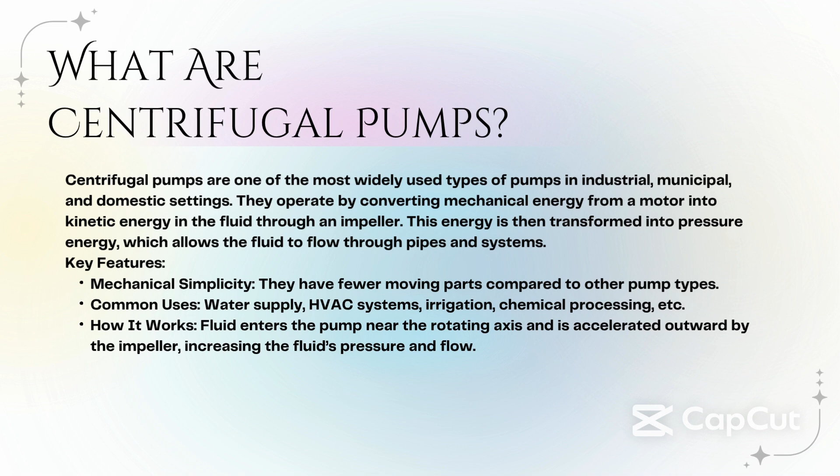So, affinity laws are mathematical formulas that describe how the key performance variables of a centrifugal pump, flow rate, head, and power, change in relation to changes in the rotational speed of the pump or the impeller diameter.

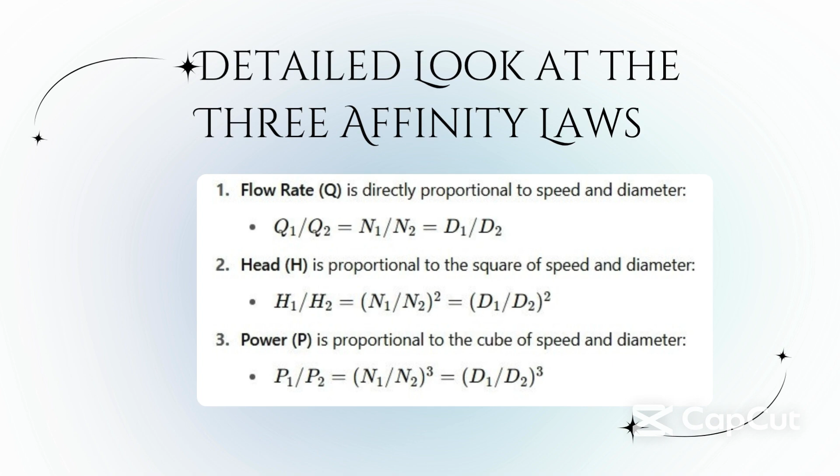So, the pump speed is changed when the impeller size is constant. The initial flow is 100 GPM, the initial head is 100 feet, and the initial power is 5 bhp. The initial speed is 1,750 RPM, and the final speed is 3,500 RPM.

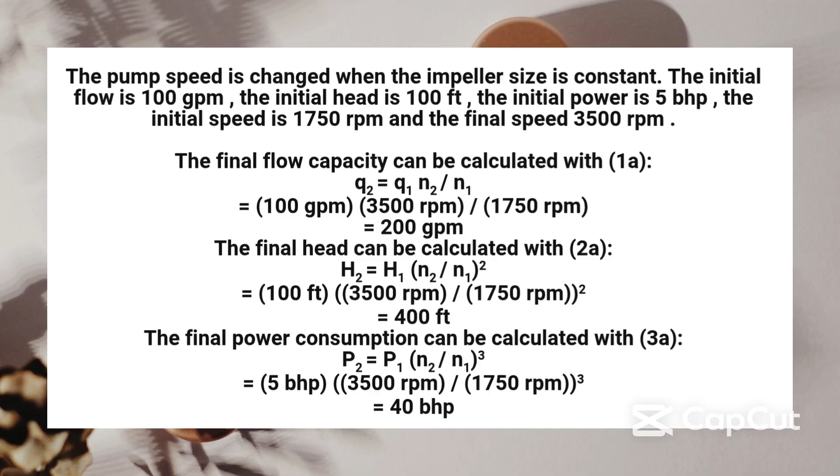So our next problem, a centrifugal pump is used in an industrial plant to circulate cooling water. At its current operating speed of 1,800 revolutions per minute, it delivers a flow rate of 100 gallons per minute, generates a head of 50 feet, and consumes 5 horsepower. Due to an increase in system demand, the engineers decide to increase the pump speed to 2,400 revolutions per minute using a variable frequency drive.

Using the pump affinity laws, calculate the following new performance parameters of the pump at 2,400 RPM. So, ito yung hinahanap natin, the new flow rate, new head, and the new power. This is the given data. And ito yung mga formulas na gagamitin natin. By using the formula, we can find the new flow rate. So here it is. By cross multiplication and dividing, we can find this new flow rate.

So by plugging in the value, the initial flow rate multiplied by the secondary speed over the initial speed. So plugging in the value 100, 24 divided by 18 is equal to 4/3, which is equivalent to 133.33 GPM. Next one is the new head.

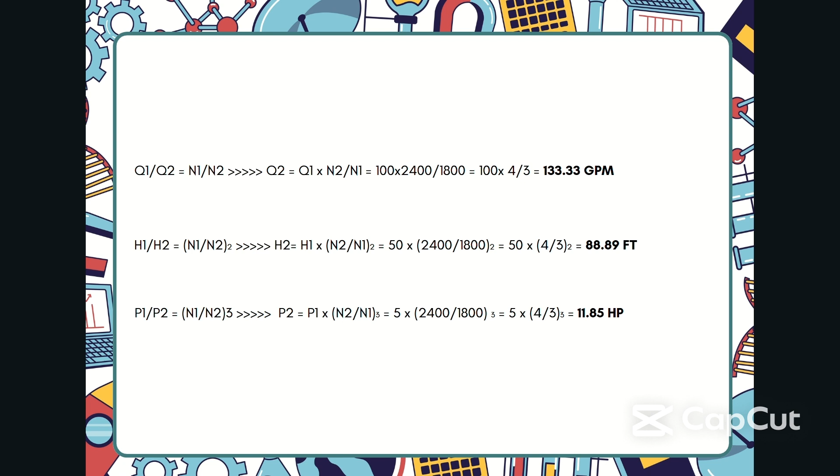Same lang din yan, naka-raise to 3 pero si speed. Raised to 3. 5 times 24 divided by 18. Same lang din, with our horsepower, 5. The equal value is 11.85 horsepower. This is the new power, new head, and then the new flow rate.

By explanation, when increasing the speed of a centrifugal pump, the flow rate increases linearly. The head increases quadratically, and the power consumption increases cubically. So this means even a small increase in RPM can significantly increase the power demand. So engineers use these laws to predict how a pump will perform at different speeds or with different impeller sizes. Important note that these laws are valid only for centrifugal pumps operating in the same system conditions and assuming no efficiency loss. That's all.

Here is the third example. A centrifugal pump designed for 1,800 RPM operation and head of 60 meters has a capacity of 11.36 cubic meters per minute with a power input of 132 kilowatts. What effect will a speed reduction to 1,200 RPM have on the revised flow rate, head, and power input of the pump? Here is the given data, and ang hahanapin natin is yung final flow rate, final head, and final power input. And ito din yung formula ng flow rate, head, and power input.

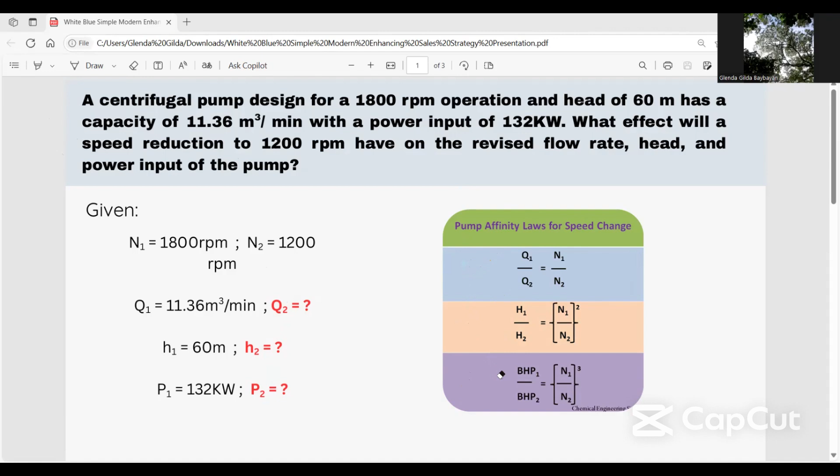Next is yung solution ng flow rate. Flow rate Q sub 2 is equal to Q sub 1 times N sub 2 divided by N sub 1. And isa-substitute lang natin yung mga value. So, Q sub 2 is equal to 11.36 cubic meters per minute times 1,200 RPM divided by 1,800 RPM. And ito yung final answer ng Q sub 2, which is 7.57 cubic meters per minute.

And sa solution naman ng new head, h sub 2 is equal to h sub 1 times n sub 2 squared divided by n sub 1 squared. And substitute ulit. H sub 2 is equal to 60 meters times 1,200 RPM squared divided by 1,800 RPM squared. The final answer of new head is